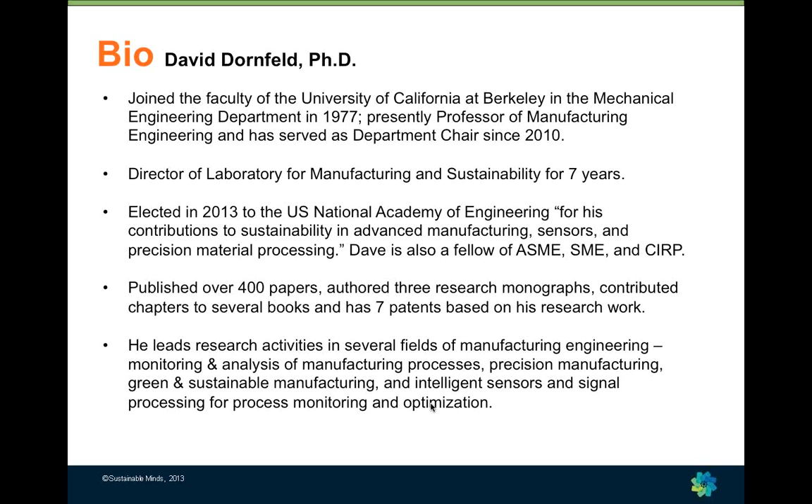So I come at this with a manufacturing focus, as do my two colleagues here, meaning that eventually you have to produce products, and eventually there are impacts caused by the production operation, and eventually there are impacts on how these products are used. And we want to try to make sure that when a design is realized, produced, manufactured, that we have taken into consideration, along with the usual quality, throughput, reliability, cost, etc. constraints, issues of resource efficiency and effectiveness. So that's sort of been an area of interest to me for about the last 15 or 20 years, and it wraps nicely over more traditional areas of focus.

A little bit of background about mechanical engineering at Berkeley.

I think compared to some of the Big Ten schools—I graduated from Wisconsin—we have a smaller program, although its enthusiasm pushes more and more students, about 600 undergraduates. We've got about 370 or so graduate students, and they're all taught and mentored by some 46 faculty members.

If you're curious, a POG is a professor of the graduate school, so when someone retires, they can still maintain active involvement in research, not so much in teaching and administration, by becoming a professor of the graduate school. This leverages the folks who've had a very long and productive career. And we have 22 staff members, of course.

Mechanical engineering is something that requires practice, both mechanical, computational, etc., experimental. So those people are very important to keep the place running.

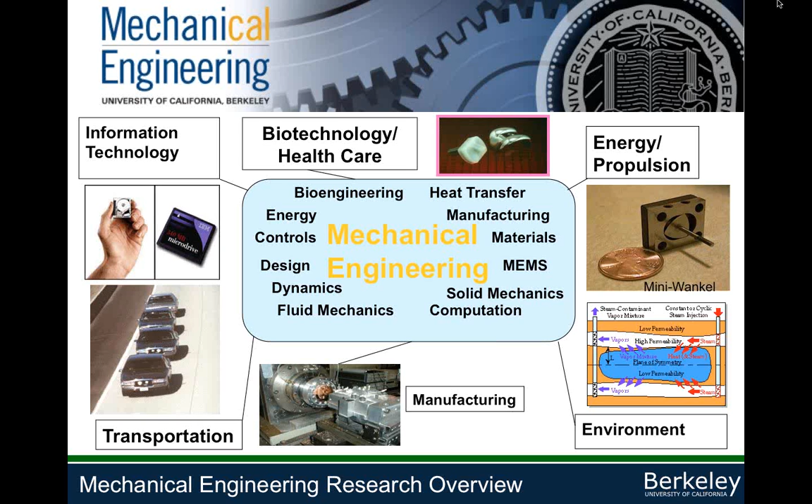The coverage in mechanical engineering these days covers the full gamut, right? You have the importance of information technology for systems and sensors. You have biotech, energy, environment, transportation, and then the core areas shown in the very center, traditional areas of mechanical engineering. Berkeley tries to emphasize social impacts to a great amount in the work that's going on, so things that map onto healthcare and quality of life, energy, safety, security, things like that, built on a platform of both science-based and practice-based engineering education. You can always check it out on the website, but it covers a broad area of activity and reflects a lot of the research going on by industry in the West Coast and the Pacific Rim that we serve with our students and our activities.

So I'll talk a little bit about the Laboratory for Manufacturing and Sustainability. It became apparent, as I said, probably 15, 20 years ago when I was on sabbatical in Europe, that companies were beginning to embrace the concerns about resource utilization, energy efficiency, material efficiency, end of life, processing characteristics, safety and security of the employees and their customers and the environment.

It also seemed like this was a good time to go into that from the point of view of what was going to be happening in the United States. Much of it is driven first by energy concerns, and you can map that onto global warming and environmental issues, but there's also, as manufacturing people, the concern about materials and resource effectiveness, utilizing materials in the most productive way so you get the largest value for a product that's created and manufactured, for the impact on the environment or social infrastructure or whatever the area of focus is. So that's what our laboratory focuses on.

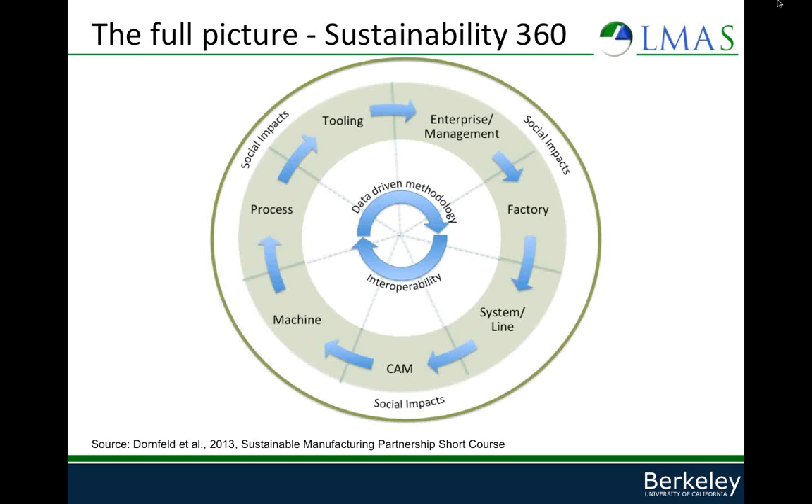Companies are being measured more and more on how well they are guardians of the supply chain and ensure that the product delivered to the customer is energy efficient, meets functional needs, cost effective, safe, but also doesn't cause problems throughout the supply chain. One can decide how to address those things, but ultimately engineers have to make those decisions and figure out what they do at the machine, factory, system, enterprise, and tooling level, and how that might have some social impact. That's a complicated one, but it's an area we're putting more attention on because it ties everything together very nicely.

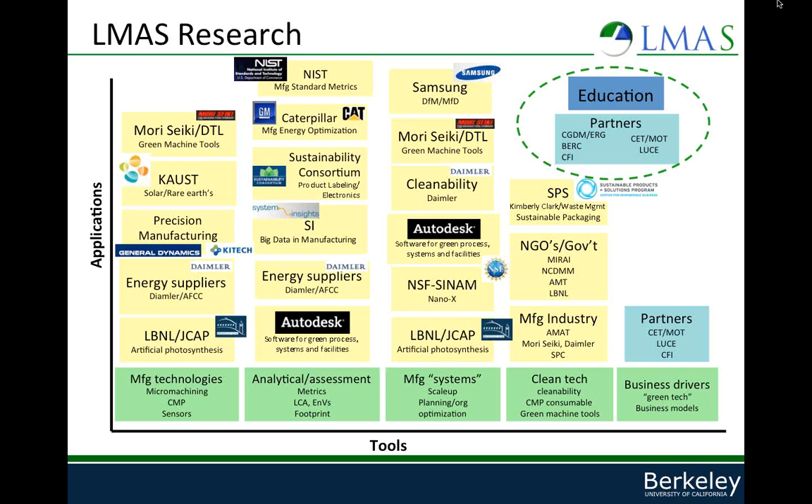Or we help define companies' interest in trying to do trade-offs on process technology, which is better or worse if I swap one technique versus another. We look at planning and optimization. A number of companies are working with us on that for the design of systems or devices. There's an emphasis on clean tech to some extent, looking at technologies that are specifically clean. And of course, we partner with campus people on education and with some in the business school on business drivers. So a range of companies supporting our work, developing software and tools and techniques that can be scaled across many different applications.

Increasingly, the consumer, whether it's a company buying your product or John Q. Public or Jane Q. Public in a large shopping center, is looking for companies they perceive to be more sustainable, better stewards of the environment, yet delivering a high-quality product for a reasonable value. There can be efforts of continuous improvement, right? Saving energy, resources, material is a good way to save money and make your process more efficient. So even if you ignored the environmental aspects, it's just a characteristic of continuous improvement.

You may be using materials at risk of disruptions in the supply chain, rare earth materials or other widely sought-after material, and that's a concern that can affect your bottom line and your ability to deliver product to the customer. You might want to reduce cost of ownership for your operations. Finally, what's happening in your supply chain outside of your facility matters. We've seen recent examples of totally unexpected things in the supply chain that had huge impacts on the ability of the factory or company to deliver product, and also the consumer's perception of how well that company is stewarding their product effectively and efficiently. So these are all questions we'd like to worry about.

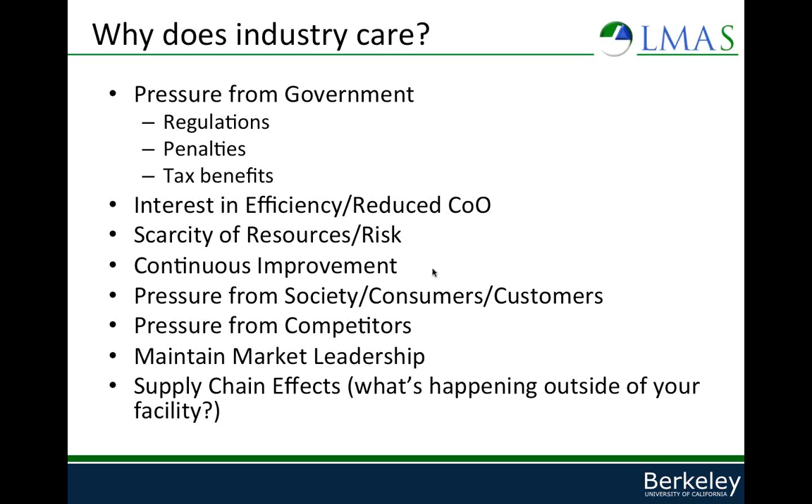The opportunities afforded by addressing these challenges are interesting, and I call them opportunities because they're essentially ways in which manufacturing can address the needs. All of the future energy, transport, and other devices and systems we're building are based on increasingly precise elements, components, materials, and complicated processes. This is a manufacturing domain, so we need to develop these technologies to meet the needs of the future.

While we are doing that, we should do it in a way that is energy and environmentally efficient. The customer is asking for it. Manufacturers are asking for it, and to the extent that it actually comes to the bottom line in terms of the cost of energy or the cost of treating waste as a result of the operation, it saves us money.

There's a lot of need for alternate energy systems being developed, and in some cases these are benchtop and need to be scaled to full-scale manufacturing to be efficient, so this is great. The machinery that makes things—a machine tool company's customer is a factory and their product is a machine tool—these would like to use less energy, materials, and space. They want efficient operation, and of course there are government regulations.

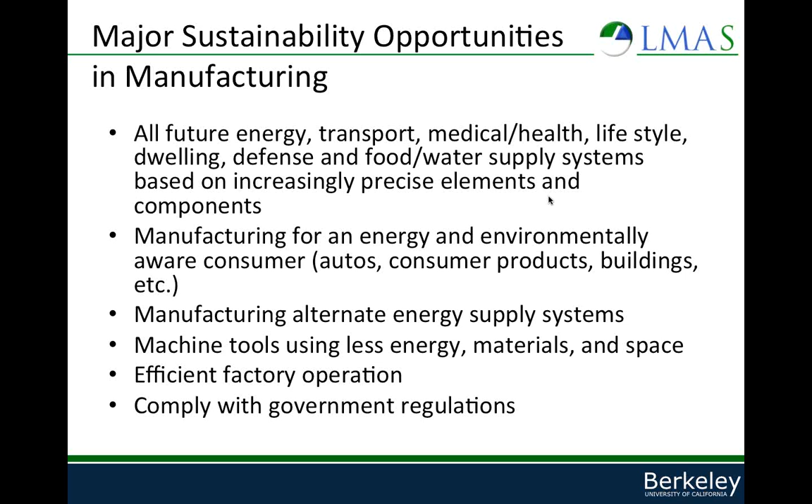So this is an opportunity for manufacturing to shine as part of an engineering activity, and linked with design, as we're going to try to show you today, how to make the whole system much more efficient.

So now I'm going to turn it over to Margot Hutchins, who is going to continue this discussion and drill a little bit deeper into some of our activities.

Thanks, Dave. So I'm going to tell you a little bit more about our philosophy and how that brought us to this engagement with Sustainable Minds.

As is likely clear by now, we view sustainability as having three pillars, as I bet many of you do as well: environment, society, and economy. Our goal is to ensure our engineering graduates are able to address all three pillars through effective design and manufacturing, because there are impacts in all three areas due to decisions made in the design and manufacturing phase. Arguably, because there are more degrees of freedom early in the product life cycle, engineers have the ability to significantly affect the life cycle impacts of products through strategic design and manufacturing decisions.

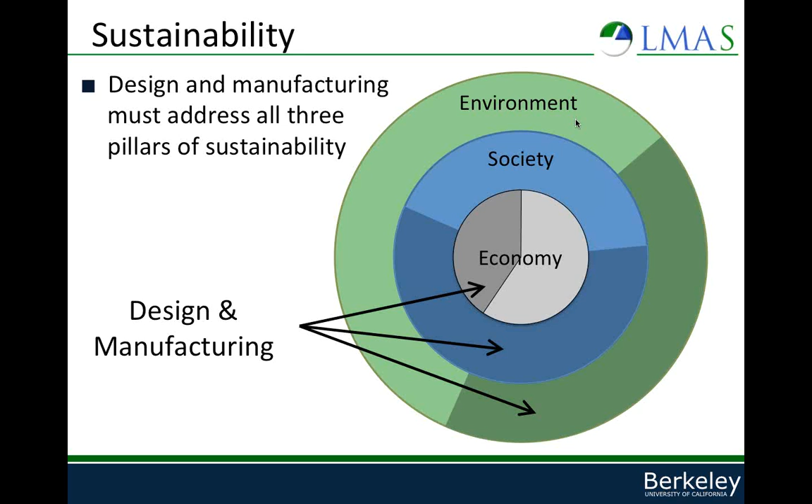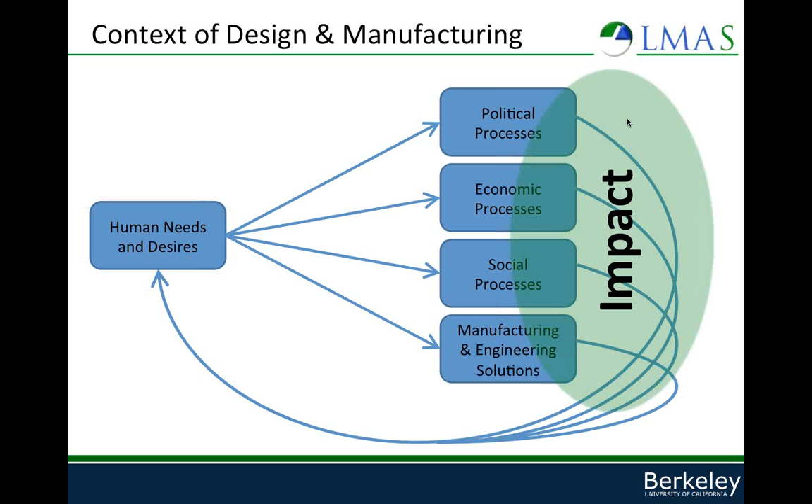We also strive to contextualize the work our students will do as engineers. We remind them that the problems they solve are driven by human needs and desires, which also drive political, social, and economic processes. Design and manufacturing engineers provide technological solutions to address human needs, and these technological solutions, as well as the political, social, and economic processes, impact human needs and desires and have some impact, whether environmental,

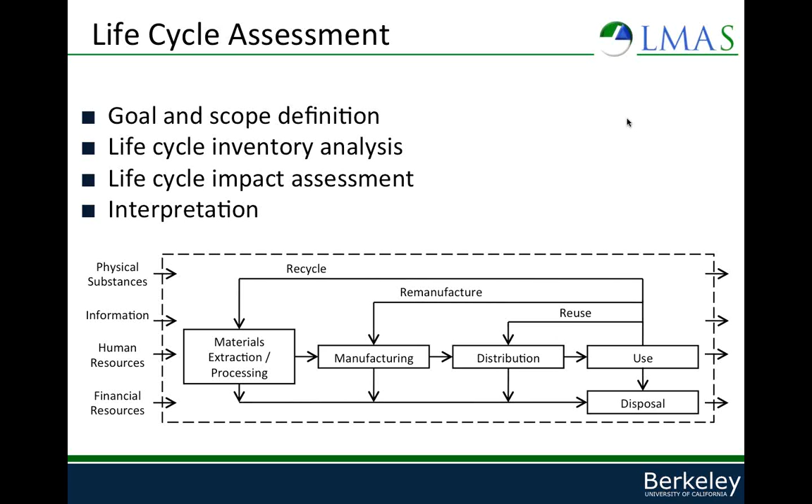Because our focus is on manufacturing, we emphasize how decisions related to manufacturing impact other life cycle phases. More specifically, one of our objectives is to enable students to leverage manufacturing for overall improvements across the life cycle of a product.

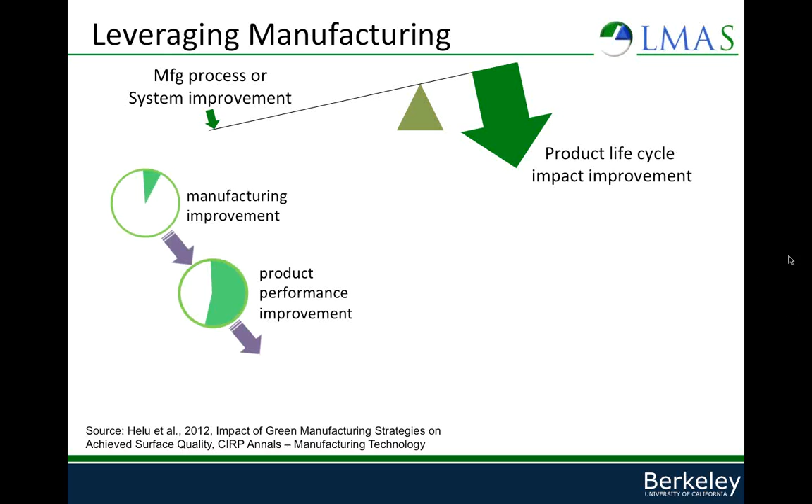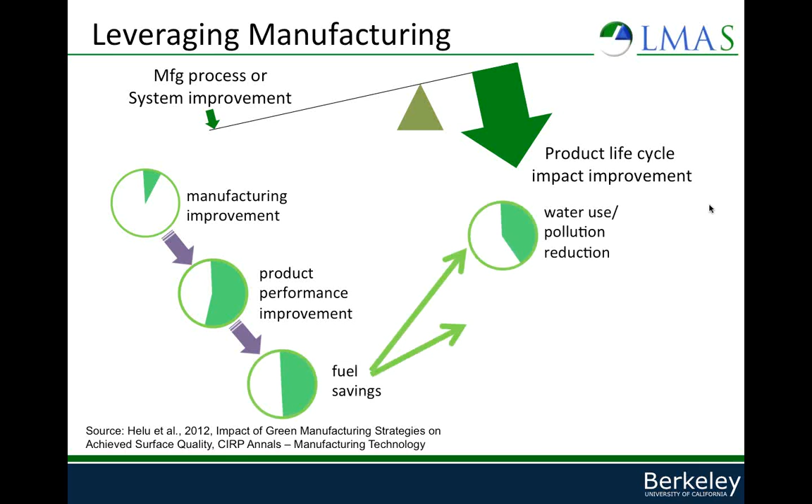We hope to provide them with the ability to identify opportunities to make a relatively small investment in the manufacturing stage, which improves product performance and results in decreased impacts, although that investment in manufacturing may create some additional impacts. There are many examples of those impacts being far outweighed by the decreased impacts in other areas of the life cycle.

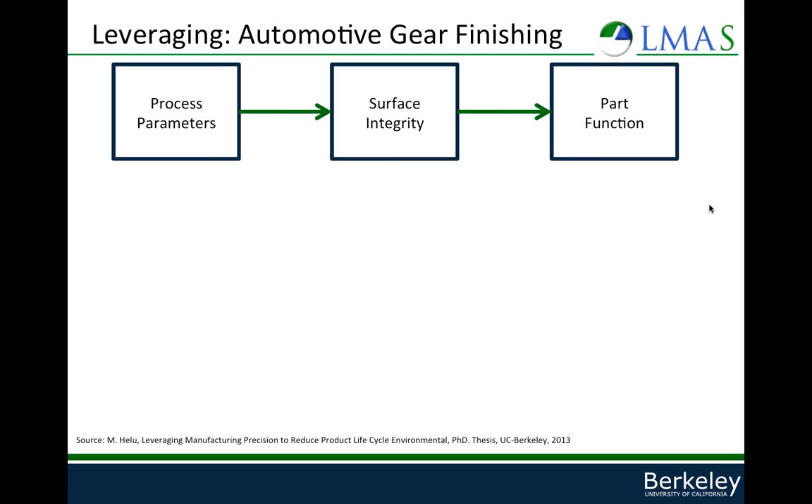The fundamental concept is connecting manufacturing process parameters to part features and eventually to part function. One of our recent graduates, Moneer Helu, uses surface integrity as the example of part feature, and as a subset, surface roughness as an example of surface integrity. Part function is represented by gear efficiency, which is influenced by surface roughness.

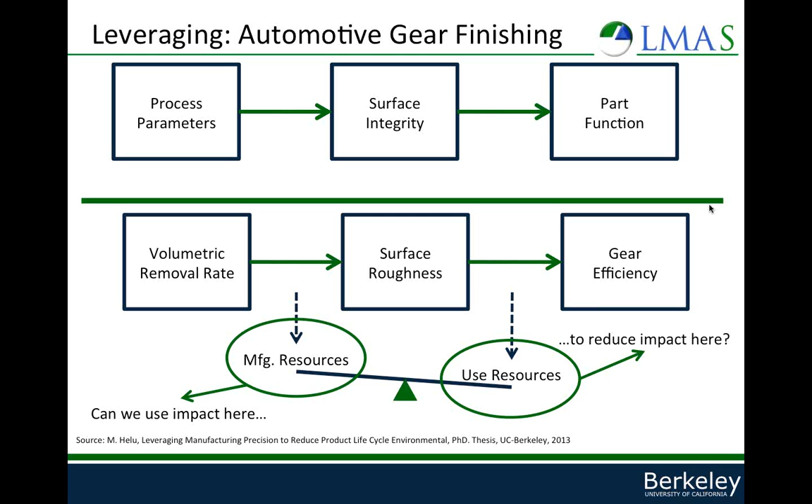The process parameter impacting surface roughness is volumetric removal rate. By selecting the correct volumetric removal rate, surface roughness can be improved, and therefore so can efficiency. By investing slightly more resources into manufacturing, resource consumption during the use phase is reduced.

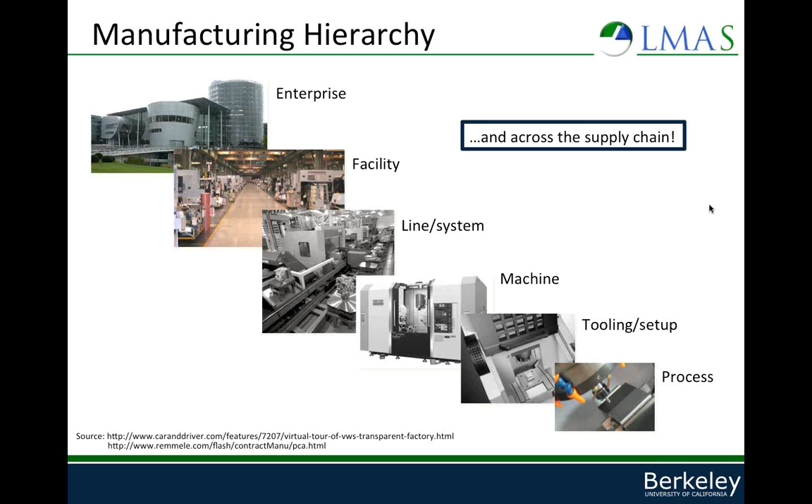Additionally, we work with students to help them understand how decisions at different levels of the manufacturing hierarchy interact within one enterprise and across the supply chain. And so I think at this point I'll turn it over to Terry for a demonstration of Sustainable Minds.